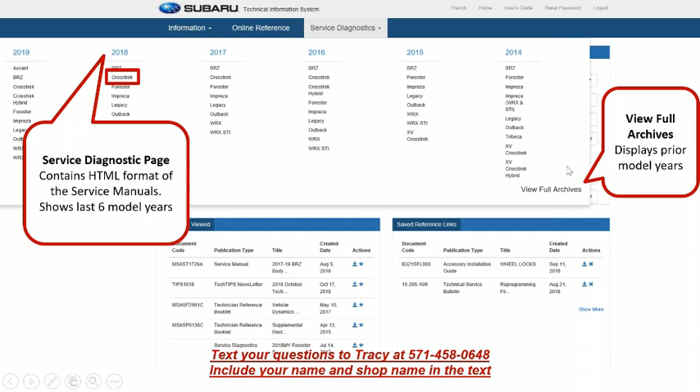Now, if you need a vehicle older than that, such as a 2010, you would just go right here where it says View Full Archives, and that would allow you to look up an older Subaru.

Now, once I go and log into this, you're going to see several tabs across the top. What we're going to do in today's webinar is share with you what's in each one of these tabs. So we're going to start first with the Index tab. I really love this Index tab, and I'm going to show you why.

Because when I go to the Index tab, it pulls up the alphabet, A through Z. And if I'm looking for a specific document on a specific component, I can just select the letter that component might start with. Let me give you an example.

One of the things I think we as collision repairers need to do is anytime we disconnect a battery on a vehicle, we need to research what procedures may be required after we reconnect the battery. So in this case, I would have just gone up to the alphabet in the top left corner and selected the B.

When I selected B, you would see it pulls up all these different words that start with the letter B in Subaru's STIS. In this instance, it says battery, removal, installation, inspection, and charge.

Once I select any of the red print you see, that is a hyperlink. Once I select that, you will see that Subaru says, when you disconnect a battery and reconnect it, these are some things you need to do. More importantly, it says if you don't do these things on the left-hand side, then the things on the right side will not work.

One of the things I'd like you to note here is that if you look at number 6, it says when you disconnect the battery and reconnect it, you have to go back and initialize the power window system. If you don't do that, it will not work.

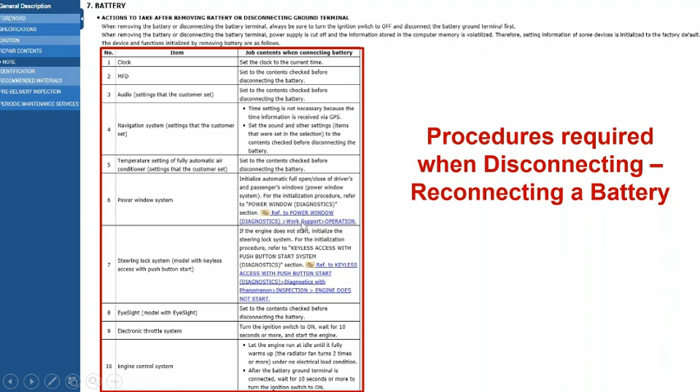Now, the next tab you're going to see at the top is the DTC search tab. I really love this tab, and I'll tell you why. When you go to scan a vehicle, pre or post, and it gives you a diagnostic trouble code, a DTC, often referred to as a fault code, what I will do is select this option, DTC search.

From there, you'll see a little box at the top where you put your DTC in, and then hit search. What it will do is bring up what that code means. Here I put B1000 in, and when I did a search, it came up and told me what that code included.

A lot of people ask me what they should charge for scanning. It's not my job to tell you how much you should charge, but I do believe you should separate your diagnostic time from your scanning time. The scanning itself is a pretty basic procedure, but what's really time consuming is the amount of time it takes to research the DTCs.

If I have a vehicle with 7 DTCs, I'm going to have to go through, put each DTC code in, and search to see what it means. How much time that takes depends on whether there's 1 code, 5 codes, or 100 codes. We really love this feature in Subaru's STIS because it gives us the ability to research each individual DTC and what it means.

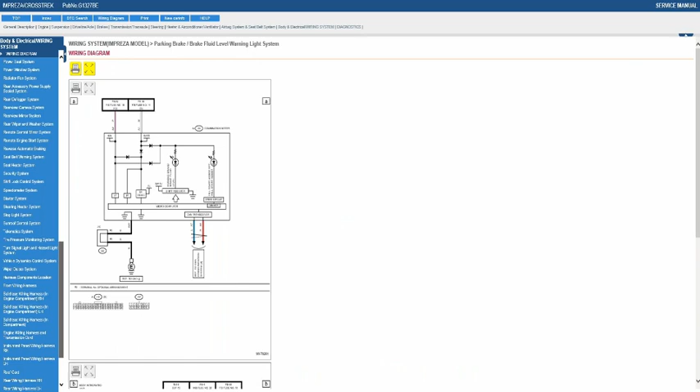Now the next tab we want to share with you is the wiring diagram. As a collision repairer, if you need to search a wiring diagram, you would select that option, and it gives you very detailed information as to the wiring schematics for that specific vehicle. This is one reason we feel you should use the VIN number when you search, so it pulls up the wiring diagram for that specific vehicle.

Now our next tab is print. This is if you want to print anything. Any document I'm looking at, I can print to paper on a printer, or print and save it as a PDF. I think everybody knows what the print option gives you to do.

Now the next tab is new car info. This allows you to open up any new car information manuals that correspond to the service manual you're viewing. As you start to get newer vehicles coming to your shop, like a 2019 Subaru, I think it's very critical that you review the new car info for that vehicle make and model. Why? Because it helps you know some of the options on that vehicle you may need to be familiar with to ensure they're working, whether it's a safety or comfort feature. I'm not saying you need to look it up on every car, but when new cars are introduced, this is a really important tab for you as an estimator to review.

Now the next tab is the help tab. This brings up a PDF document that gives you instructions on how to navigate the STIS site. We did a webinar last month that was an hour long, and this month's webinar is going to be about 70 or 80 minutes. Hopefully you'll watch those two webinars to get a very intimate feel from a collision repair perspective on how to utilize STIS. But I'd also encourage you to go to the help screen and read that tab, which will walk you through how to interpret and navigate the STIS website.

There was a great thing we saw when we went to the help tab. If you look down at the bottom, it shows this little star. One thing we found is that anytime you see a star within Subaru's STIS, it means it's a one-time use part. Keep in mind, one-time use parts are not going to be referenced in the electronic parts catalog. They're only referenced in the OEM repair website through Subaru STIS. So it's critical that you research the OEM repair procedures through Subaru so you can identify one-time use parts. So again, what does a star mean?

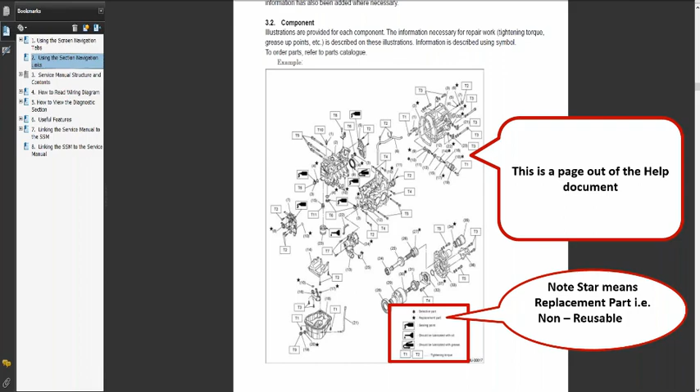Now the next thing we're going to walk you through is the service manual and the option that says general description. Again, at the top we still have all of our website links, index, DTC search, wiring diagram, print, new car info, and help. We've already covered this for you. Below that, you see some other areas in gray. We're going to walk you through what each one of these tabs means across the top. The first one we'll click on is the general description tab.

When you click on the general description tab, this gives you repair precautions that you may need to know as a collision repairer, either as a technician or estimator. We found that a quick review of the repair contents, anytime you go into Subaru's STIS for that specific vehicle make and model, is an absolute must.

Continuing on through the general description tab, as we scrolled down through this, we found some very interesting information. On the left-hand side of your screen in the blue box, you'll see all the different options under the general description tab: general description, repair things you need to know regarding air conditioning or the tire pressure monitor sensor, whatever the case may be. But let me show you one that we saw right here.

That was when we clicked on the transmission tab. You'll see where it says preparation for learning. So how do we handle the learning process? Well, that's where we use a diagnostic scan tool from Subaru. But look what it says: preparation for learning - warm up or cool down until the ATF temperature is displayed on the Subaru Select Monitor, which is their factory scan tool, of 104 to 149 degrees Fahrenheit.

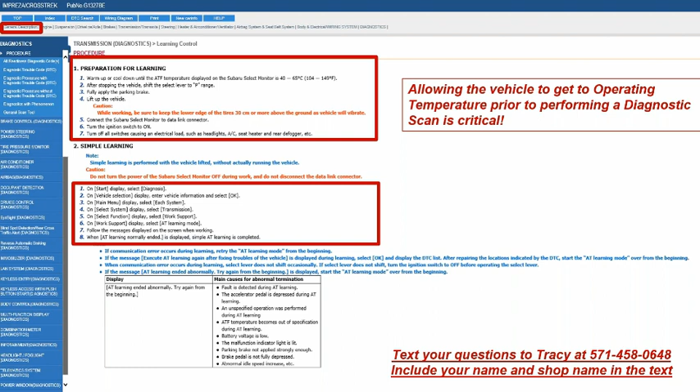Now, if I'm in Miami, Florida or Fort Lauderdale, maybe it doesn't take that long for a vehicle to get to operating temperature. But if I'm in Montana or Minnesota in the middle of winter, or Alaska, where some of our good friends are at, it's important you allow the vehicle to get to operating temperature. And the way you can tell if it's at operating temperature is to make sure you use your Subaru Select Monitor OEM factory scan tool.

Now continuing on through the general description tab, you also see there's a section here that says electrical. When you go into electrical, this is where you also find, for a second time, some of the things you need to think about if you ever disconnect a battery. Originally, I went to index and selected the option B, then selected battery, which took me to the screen you're seeing right here, but you would also find that under the electrical tab - so you might want to make a note of this right now.

If you're a collision repairer, anytime you disconnect a battery and reconnect it on a Subaru, make sure you do a search for the battery, and that will give you these things that need to be redone. Again, this is going to be very vehicle make and model specific, and some of these operations may require the use of the Subaru factory scan tool. If you click on the blue link I just shared with you, under the power window diagnostics, this would tell you the initialization process. So again, my friends, if you disconnect a battery, make sure you research what procedures are required when you reconnect it, and you will find that under the general description tab, then go to electrical.

All right, continuing down through here under the general description tab, you will see where it says repair contents.

This is another example of some of the information we'll give you. For example, if you're going to disconnect an electrical wiring connector, there's a right way to do it and a wrong way to do it. This may be great for you to print out for any entry-level technicians you have that are learning how to disassemble a vehicle.

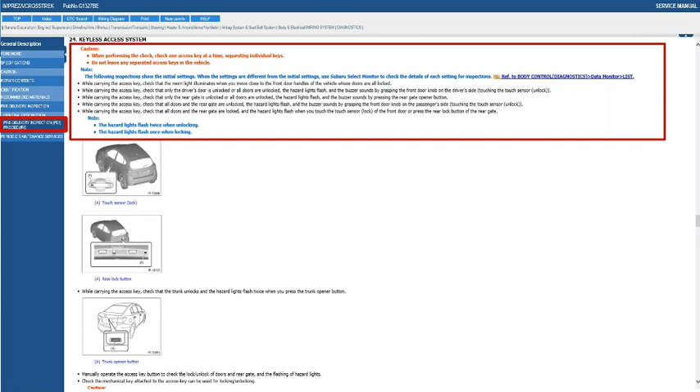Ladies and gentlemen, when we take a door apart and put it back on, are you really making sure all of these key functions work on the door? It's telling me right here the best way to do that is to use a Subaru Select Monitor, which is the OEM factory scan tool. If some of you are using asTech, which is a vendor recognized by Subaru, make sure you tell them you'd like them to do these things for you as well.

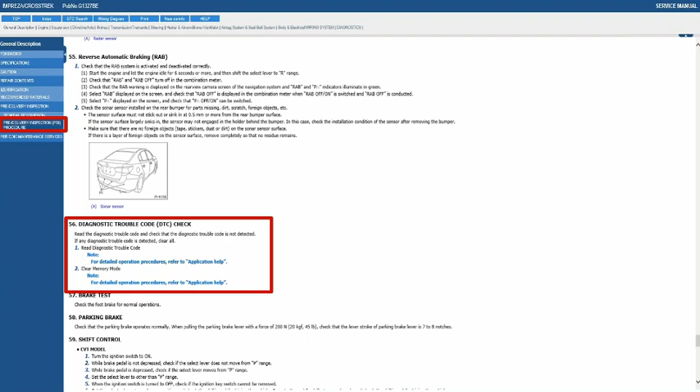We continue on down here, and what else does it tell you to do? It says, look, before you even sell the car, make sure you read the diagnostic trouble codes and make sure that no codes are detected. Ladies and gentlemen, I could spend all day just on this pre-delivery inspection, but there's a lot of great content in here that shops need to review and incorporate into their quality control checklist.

Now let's talk about the next tab, the suspension tab. When I go into the suspension tab, and it says engine/suspension, we're just using suspension in our example here in today's webinar. One of the things we found in here, it said caution, do not reuse the valve and screw. Replace the valve and screw with a new part, even when reusing the transmitter. So if you go into Subaru's own repair procedures, it says right here you need to put a new valve stem on the vehicle every time you put a new wheel on there. This is some of the information you'll find under the suspension tab.

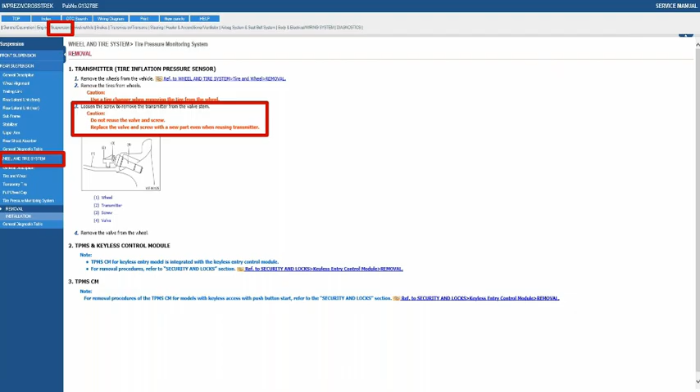Now let's go to the next tab, which is steering. We're moving through this very quickly, but understand this webinar is to give you some insight, and we hope this will encourage you to go back and navigate STIS and actually play with it, because repetition is key. Now look right here what we saw.

We went under the steering tab, and look what it says. It says when the wheel alignment has been adjusted, perform the following adjustment: lane keep assist learning value clear for vehicles with EyeSight, and then VDC sensor midpoint setting mode.

So ladies and gentlemen, when we R&I a steering rack or suspension to replace a frame rail or an apron, or maybe do a four-wheel alignment on this vehicle because the wheel or tire got replaced, we need to make sure these vehicle functions, for example EyeSight or the VDC, are all working properly. If you click on those blue hyperlinks, that will lead you to how to perform that specific operation so your technicians do it properly.

Now let's go into the airbag system and seatbelt system. We went ahead and clicked on here. We're looking at all these great options across the top, and we clicked on airbag system and seatbelt system. And look what it says: do not reuse mounting bolts and nuts. And not only that, it gives us very specific torque specs for the curtain airbag sensor.

Now keep in mind, anytime we replace a quarter panel, or even repair a quarter panel, Subaru states that you shouldn't do any cutting or grinding or any strong impacts near these components. We also know well that you shouldn't weld near an electrical component. So if you R&I an airbag for replacing a quarter panel, my question is, are you actually replacing the mounting bolts and nuts? Because if not, you're not doing a safe and proper repair.

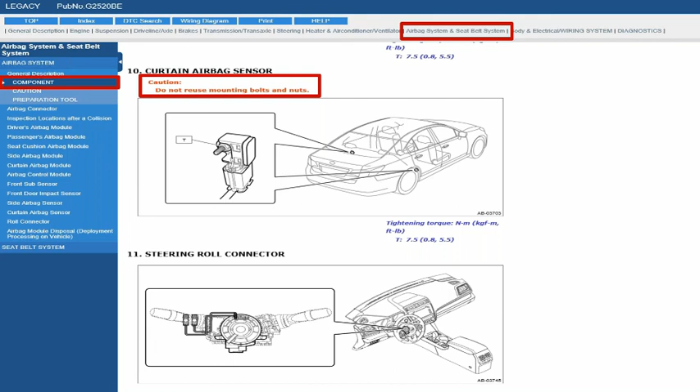But more importantly, it gives us very specific torque specifications for these. I have to tell you, as a collision repair industry expert, or at least I hope I'm knowledgeable, I don't believe a lot of people are actually looking up the torque specs when they go to reinstall these airbags or airbag sensors. So make sure you're looking that up for your technicians as an estimator.

It says when painting or performing sheet metal work on the vehicle, remove the following parts. Performing the work without removing the parts may cause secondary malfunction. Now look what it says.

It says if you're working on or painting the front part of the vehicle, meaning the apron, the front fender, or the radiator side panel, which is a baffle, you need to remove the front sub-sensor airbag of the airbag system and the wiring harness. So ladies and gentlemen, if you're going to be repairing or replacing the apron, or repairing or replacing the core support, you need to remove the airbag sensor as well as set the wiring harness out of the way.

Look what else it says down here. It says side or its vicinity of the vehicle, including the side sill. Now what's a side sill? That's a rocker panel, right? It says if you're going to be doing some type of repair or replace on the rocker panel, center pillar, or even the doors, you need to consider removing the side airbag sensor and maybe even the overhead sensor, and setting the wire harness back.

In addition, it says before starting parts replacement, if the following parts are deformed or damaged, replace with new parts, airbag sensors, etc. Again, where did I find this at? Go to the airbag system and seatbelt system section, and from there, go to caution. Anytime you do a repair, go to the caution and see what types of things you may need to remove if you're doing any painting or even repair in that vicinity.

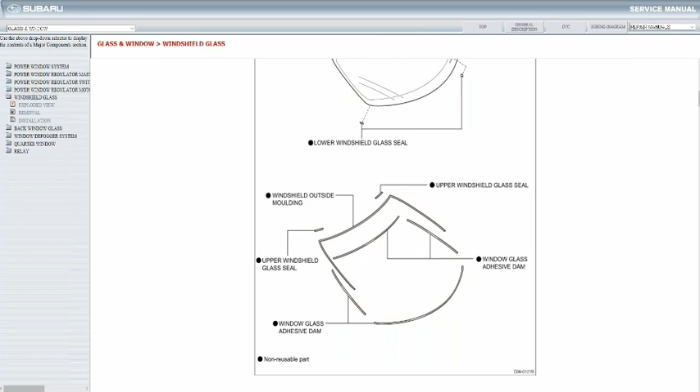Now again, Subaru uses a star for one-time use parts, but if you're in the BRZ, they use a black dot, and that's the symbol for a non-reusable part on the BRZ. You'll see, for example, here, every time you were to R&I a rear window on this vehicle, much like replacing a quarter panel, you R&I the back glass, for several parts that are non-reusable. You'll see here that if you were to R&I a headlamp on a BRZ, the headlamp gasket is non-reusable. You'll see here that the door vapor barrier is non-reusable.

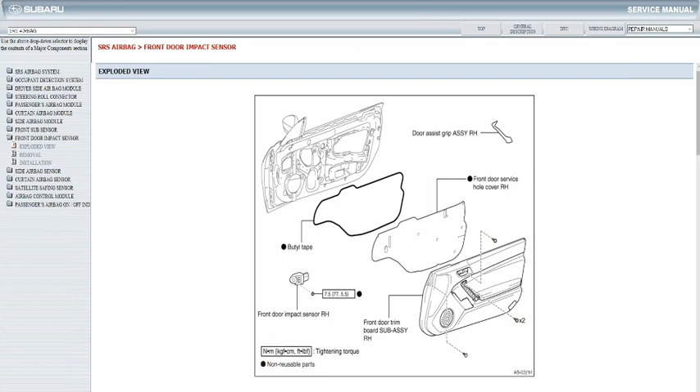So again, don't want to beat this thing up too much. Just want you to understand, ladies and gentlemen, every Subaru symbol for non-reusable parts is a star, with the exception of the BRZ. Now again, when I go to the BRZ, you'll see that it also has a bit of a different look and feel than how you're navigating the other Subaru OEM repair procedures through STIS.

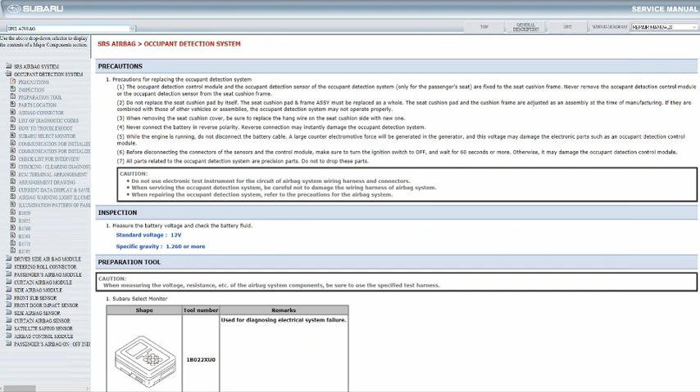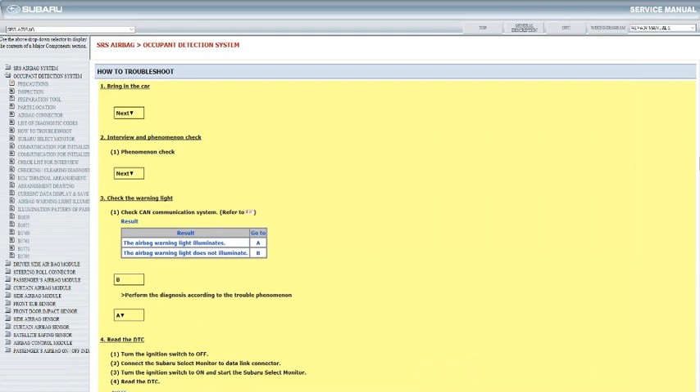Again, you'll see right here that if I was to put a DTC in, it would also tell you, just like the other Subaru stuff, if you get this fault code, these things over here are the probable cause. And if I click on the little red finger that's pointing, that would actually take me to how to investigate this and drill down into it further. Just taking you through this, giving you a feel for how the BRZ Subaru STIS procedures absolutely work. Now again, you will see right here that it still references the Subaru Select Monitor, which is the factory scan tool for the occupant detection system.

Okay, now a couple other things I want to show you here. One of the things we found in all of the Subaru vehicles we researched is there's a wait time after you disconnect the battery. You'll see right here at the bottom it says: warning, after disconnecting the battery ground terminal, do not start the work before waiting 60 seconds. What we found is that depending on the Subaru you're working on, there will be different wait times before you can begin repairs. So don't just jump right on the vehicle after you disconnect the battery. Give it a little bit of time to make sure you allow it to power down.

You'll see the above warning. It says the airbag and pre-tensioner system are fitted with a backup power supply. If you start the work within 60 seconds after disconnecting the battery, the airbag may be activated. So make sure you don't start on the vehicle until you adhere to the proper wait time that Subaru dictates for you in STIS.

Now, another thing we saw under the BRZ was it says if the airbag has been activated, replace the front door impact sensor with a new one. So understand, if the airbag is activated or deploys, you still need to replace the door impact sensor, even if the door is not damaged. It also says do not reuse the bolt and nut. So it's important that we don't just rely on the estimating systems to tell us when an airbag deploys, replace these components. We need to research repair procedures, because in this instance you actually have to replace the front door impact sensor.

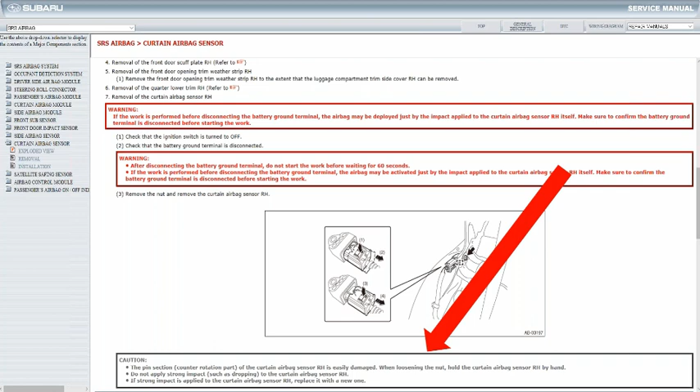So you say, well Mike, how do I know if it's damaged? The insurance company doesn't want to pay for it. That's where you would use your Subaru OEM factory scan tool to perform an output or functionality test to see if a DTC returns. Again, a very cool list of procedures here that you'll find under the BRZ.

And again, it tells you if you replace these parts, these are some procedures that are required. So look right here what it says: if I replace the steering column, or if I replace the power steering computer assembly, then I need to do a zero-point calibration. Again, these are some things that we need to be researching.

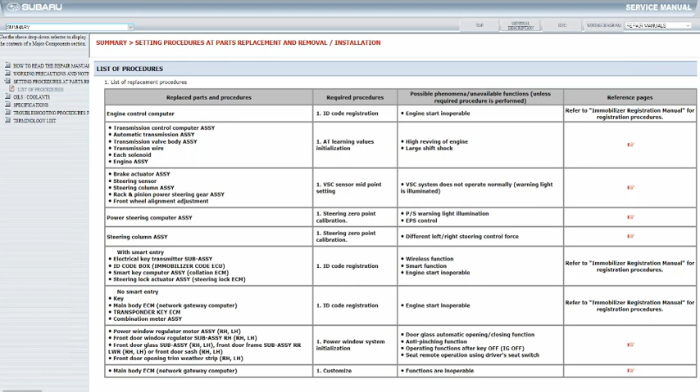So how would you find these? You're going to see up here where it says setting procedures. This would be a key search word you might want to utilize when you're in Subaru's STIS. So you might want to write that down as just a search feature to get you to this document pretty quickly.

Now, another thing I saw here that was very interesting is that it tells me before I can actually aim the headlights on this BRZ, I have to make sure that the vehicle is parked on a level surface, that the fuel tank is filled, as well as the appropriate amount of oil and coolant, and that the tire pressure is where it's supposed to be at. In addition, it says have one person get in the driver's seat.

So those days of aiming a headlight—and I hope none of you guys are doing this—where we just pull it up and see how it looks on a wall, that's not enough anymore. In this case, to aim the headlights on this specific Subaru, I have to make sure there's no luggage in the trunk, the fuel tank's full, I've got the right amount of oil and coolant, the right tire pressure, and someone sitting in the driver's seat.

And then, ladies and gentlemen, that's when I will take and aim or align my headlight. So some pretty cool stuff here from Subaru.

Now we're going to talk a little bit about the owner's manual. As I've shared, based on all the OEM webinars we've done monthly, one thing I've learned is the value of reviewing the owner's manual with the consumer when they bring their vehicle in. Every OEM manufacturer, specifically Subaru here, let's say Ms. Dabrowski comes in and I ask if we can go over her owner's manual together before she drops off her Subaru. She may or may not have it in her glove box. If she doesn't, I can go to Subaru's STIS and print out her owner's manual for her.

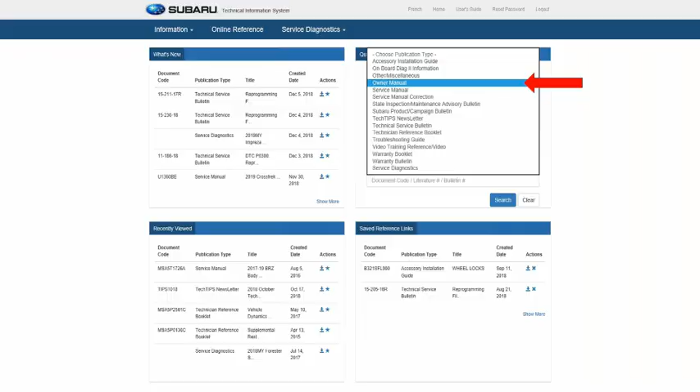Now you say, why do you have to go over the owner's manual with the customer before they drop their car off? Well, I'm going to show you. Look what it says right here in this specific Subaru module, module 1, page 12: replace all seatbelt assemblies, including retractors and attaching hardware worn by occupants of a vehicle that has been in a serious accident. The entire assembly should be replaced even if the damage is not obvious. Do you think this is something we should be reviewing with the customer when they drop their vehicle off? I think it is.

But more importantly, are you replacing the seatbelts on this specific Subaru where it states that in this specific owner's manual? So I encourage you to start becoming familiar with the owner's manual as well as the OEM repair procedures on any vehicle you're going to fix, no matter the OEM, but specifically on Subaru.

Now look what else it says right here, again in the owner's manual, in this little red box: do not modify, remove, or strike the seatbelt retractor assemblies equipped with seatbelt pretensioners or the surrounding area. This could result in accidental activation of the seatbelt pretensioners or make the system inoperative, possibly resulting in serious injury. Seatbelt pretensioners have no user serviceable parts. So what is it saying? Do not modify, remove, or strike. If you're going to be doing any type of repair in the vicinity of a seatbelt, you need to remove it. Do not be hammering, drilling, beating, banging, or pulling anywhere in the vicinity of a seatbelt. You need to remove it.

Let's see what else it says. Still in the owner's manual, in the red box on the left-hand side: if your vehicle has sustained impact, this may affect the proper function of the Subaru Advanced Frontal Airbag System. Have your vehicle inspected at your Subaru dealer. Do not use the front passenger seat while driving the vehicle to your Subaru dealer. So here's the deal: if the vehicle sustained impact, you need to ensure the frontal airbag system is working properly and have it inspected. Well, how do you think a dealership inspects the airbag system? They use a scan tool to perform an output or functionality test.

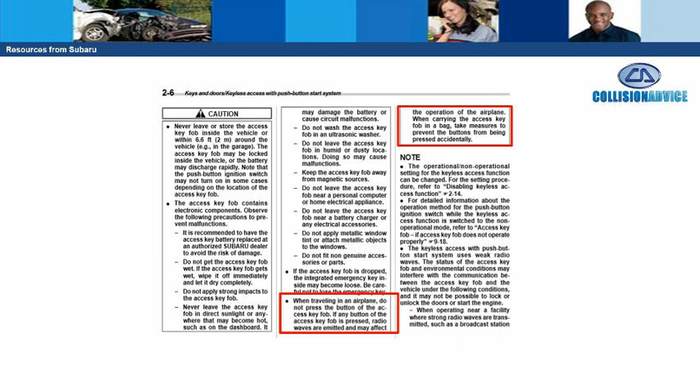Now, look what else it says in the owner's manual. It says after the vehicle battery is discharged or replaced, initialization of the steering lock system may be required to start the engine. In this case, perform the following procedure. So ladies and gentlemen, when you disconnect the battery, you actually have to turn the push button ignition switch to the off position, and it tells you what you need to do. It also says you got to open and close the driver's door and then wait 10 seconds. Ladies and gentlemen, how often are we disconnecting the battery to do repairs on a vehicle? Quite often. But are you doing this initialization of the steering lock system? Again, ladies and gentlemen, this is in the owner's manual.

Look what else the owner's manual says. Do not attach any accessories, labels, or stickers other than properly placed inspection stickers to the windshield, because these items may obstruct your view. Ladies and gentlemen, if you have a vehicle that comes in and you notice that they've got some things on their windshield, you may want to point this out to them in the owner's manual. Remember, what are consumers looking for? Consumers are looking for three things when they deal with a shop: trust, empathy, and direction. Ladies and gentlemen, reviewing this owner's manual with a customer is a great way to gain that Subaru vehicle owner's trust.

Now, look what else is in the owner's manual, ladies and gentlemen. Check this out. It says, if your vehicle is involved in an accident, be sure to inspect the ground under the vehicle before restarting the engine. If you find that fuel has leaked on the ground, do not try to restart the engine. The fuel system has been damaged and is in need of repair. So again, ladies and gentlemen, going on below this, right below that box, look what it says. Your vehicle has a fuel pump shutoff system. When the vehicle sustains an impact in an accident, the fuel pump shutoff system stops supplying fuel. However, depending on the impact conditions at the time of a collision, the fuel pump shutoff system may not operate. Perform the following procedures. So ladies and gentlemen, if you have a Subaru that gets towed into your shop that will not start after an accident, I would encourage you that this might be one of the first things you check, and then it may actually need to be redone so the vehicle will start properly.

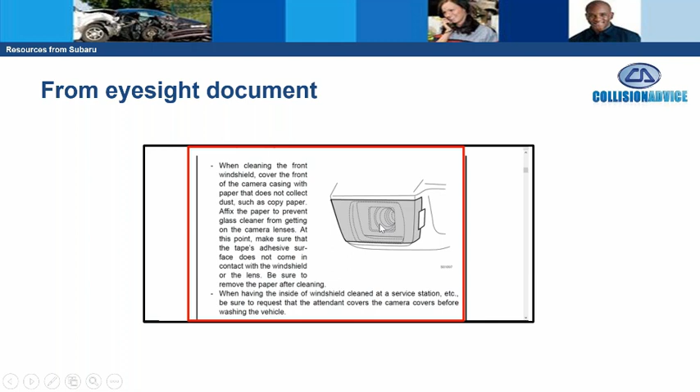It says also, when having the inside of the windshield cleaned at a service station, be sure to request that the attendant covers the camera covers. Ladies and gentlemen, I know we all clean the car before we give it back to the consumer, and that's what Subaru wants us to do. But you need to make sure that if you have a detail department cleaning a Subaru that has EyeSight, make sure they don't just spray window cleaner all over the windshield or cause any problems where the EyeSight is at. We could actually damage that or cause it not to perform properly, so use precaution when cleaning the windshield.

Now, here's another thing I found in Subaru. Yes sir, Mike, this is JJ. I just wanted to let everybody know, with the EyeSight camera lenses, if anything gets on those lenses, even a fingerprint, they cannot be cleaned and the camera assembly must be replaced. Could you restate that again, sir? If anything gets on those lenses, they cannot be cleaned and the camera must be replaced. Wow, you can't touch those lenses. You can use light compressed air if it's just dust, but anything else is going to require a camera lens replacement. Man, that's awesome to know, sir. Thank you for sharing that.

That's awesome. So ladies and gentlemen, we've got to make sure our cleanup department that cleans cars follows these procedures to the T. And that's why, again, researching all of your Subarus through STIS is critical. Thanks for sharing that, sir.

Now our next thing is the Subaru Technical Information System. When I log back in, on the right-hand side there's a drop-down menu where I see the owner's manual, the service manual, and something else I found called the Tech Tips Newsletter. This can also be found under the What's New tab, on the left-hand side, and this is the most recent Tech Tips newsletter.

But ladies and gentlemen, I would encourage you to select that and start reviewing it with your technicians. By the way, this is published monthly. Let me tell you why I think you should review this Subaru Tech Tips newsletter monthly with your team. John, I'll just throw this out there—I think this would be a great thing to email to all your certified shops or any shop in the collision repair industry.

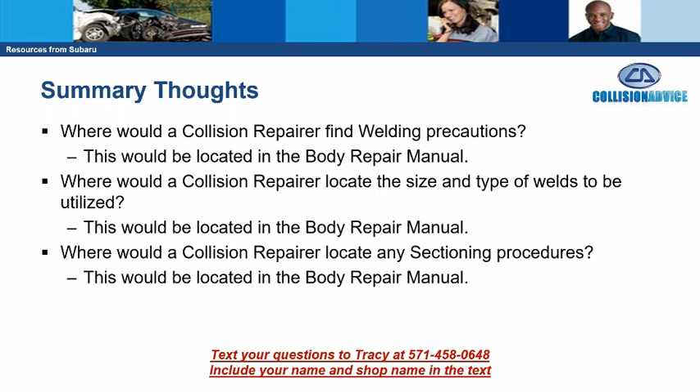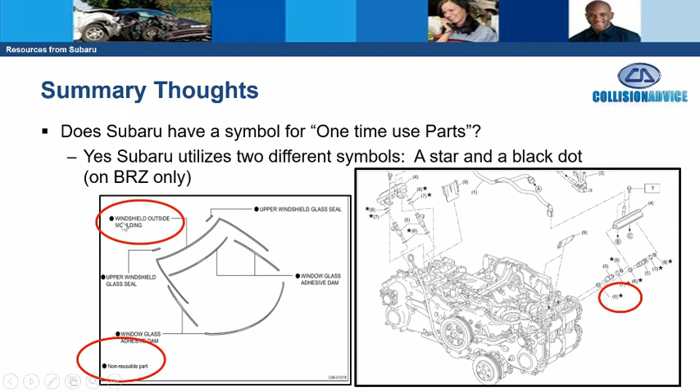Next question was, does Subaru have a symbol for one-time use parts? Yes, it is going to be a black star like you see on the right-hand side. You see a black star? That is a one-time use part. The only exception would be on the BRZ, and they would use a black dot, which is the same symbol that Toyota uses. The next question was, do any of the Subaru vehicles have the ability to be connected to the internet?

Somebody actually referenced GM's OnStar and Toyota Safety Connect. Yes, however, it will depend on the vehicle. Now, Subaru's version of OnStar is referred to as Starlink. And if you want to find any information about Starlink, you would go into the service manual and look up telematics.

One of the other questions we had for Subaru, and they were nice enough to answer, was, will the Starlink system email the customer if there's a problem with the vehicle or a DTC? And the answer is yes. If the customer has an active subscription, it will notify them via email. If their subscription isn't active, then the DTC will be stored until it's cleared.

So ladies and gentlemen, that's even more important why we should do a post-repair scan to ensure that all of the DTCs have been cleared or at least addressed with the consumer.

So the next question was, if I'm working on a vehicle and I take the headlight out or the door handle off, I don't want the customer being notified from Subaru because they might be upset with me. Well, you're right, so you would have to disable the system first.

So we asked Subaru, how do you do that? And Subaru gave us a pretty detailed explanation here. It says the DCM telematics module does not transmit DTCs or illuminate the warning lamp despite backup operation when it's off. So basically, when you turn this feature off, it won't transmit data to Subaru, who might in turn get in touch with the customer.

And then Subaru gave us a process here for how to do that. Before you start taking the car apart, if it's subscribed to Subaru Starlink, we need to make sure we disconnect the DCM connector and then leave it in that condition until the repair is done. Once you reassemble the vehicle, you will have to clear the memory. It says perform the clear memory at the first ignition on, EG-OFF timing, right after the repair.

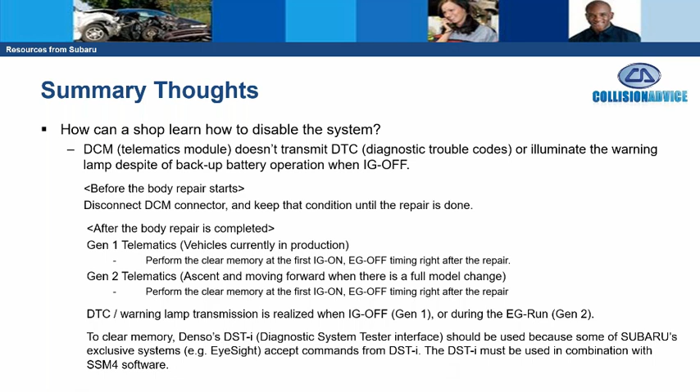So ladies and gentlemen, here's what I'm going to tell you. If you're using a generic or aftermarket scan tool to do anything at all with some of these telematics modules, it actually could create a problem. All right, let's move on from this.

Next question we had for the Subaru team was, what's the name, cost, and other information regarding Subaru's scan tool? Subaru calls their factory scan tool a Subaru Select Monitor 4. You'll also notice that they use an abbreviation for this, SSM4.

Now, I will tell you, that's a great term to put into your search feature of the Subaru STIS because it will help you pull up all the different things you may have to use a scan tool for, which helps you justify your case to an insurer.

The cost for the tool, the Subaru Select Monitor scan tool, is $3,200, and then it's $2,700 a year for the software subscription.

Also, the question was, does Subaru require battery support when checking DTCs or scanning a vehicle? And the answer is yes. So keep this in mind, ladies and gentlemen. When you start thinking about scan times, number one, you have to pull the vehicle in, you have to allow the vehicle to get to operating temperature, and we then have to hook up battery support, to make sure it has a full charge before we do any diagnostics with a scan tool on it.

Now, Subaru recognizes a tool or piece of equipment called a Midtronics GR8. I will tell you there are 5 other car manufacturers that also recommend having a Midtronics GR8. If I'm a collision repairer today, I would absolutely purchase a Midtronics GR8, and I would be utilizing that anytime I scan a vehicle.

Another question was, what additional equipment might be needed to perform these operations? If you have a vehicle with EyeSight and it requires calibration, it does require the use of a target.